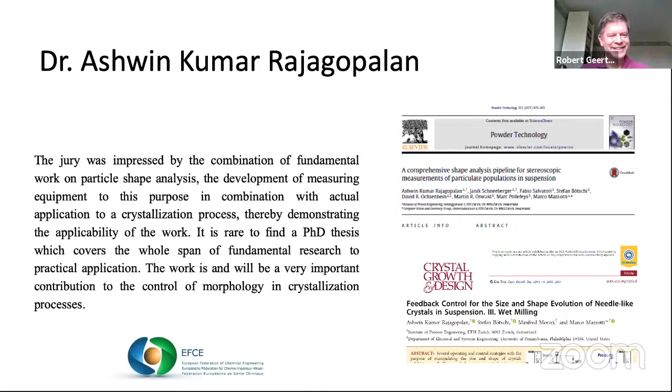But again, well done and congratulations.

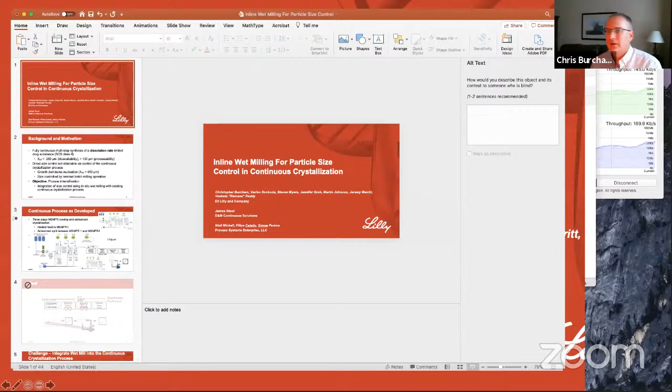Robert, thank you for that very kind introduction. It has been 15 years that we've worked together, so it's really quite impressive. It's been a fun ride. Let me get my screen up. Okay, so hopefully everyone has seen the title slide and not the presenter view. Let me go ahead and get going.

Again, thank you for that kind introduction, and I really want to thank the Working Party for the invitation to speak to you today. For those hoping for Jean-Paul, I apologize. I won't be anywhere close to his level of presentation skills, but I do hope you'll find what I'm talking about today interesting and hopefully motivating. Today I'll talk about utilization of inline wet milling for particle size control during a continuous crystallization. When we started this work, it seemed like such an easy concept, but it turned out to have some challenges that were pretty exciting to overcome.

This project that I will discuss is a very real project, and you can tell by the large number of collaborators on this work that there was a lot going on. This was part of a multi-step, fully continuous drug substance process, which involved three different chemical transformations, a couple of different separations - liquid-liquid extraction, distillation, concentration, you name it - and then at the tail end was the crystallization and isolation of the API. I want to call out one particular colleague, Václav Svoboda. Václav really should be giving this talk today - he did the lion's share of the experimental work I'll be discussing. I appreciate and acknowledge all the efforts he provided, and also my collaborators at PSE who helped with the modeling aspects I will discuss.

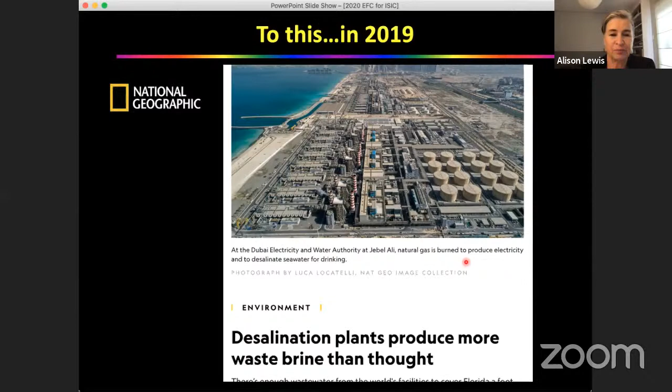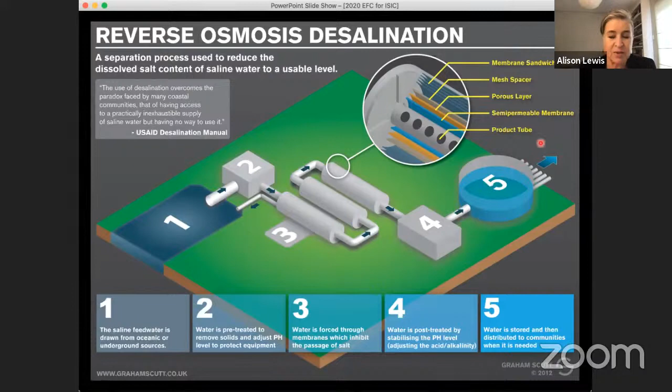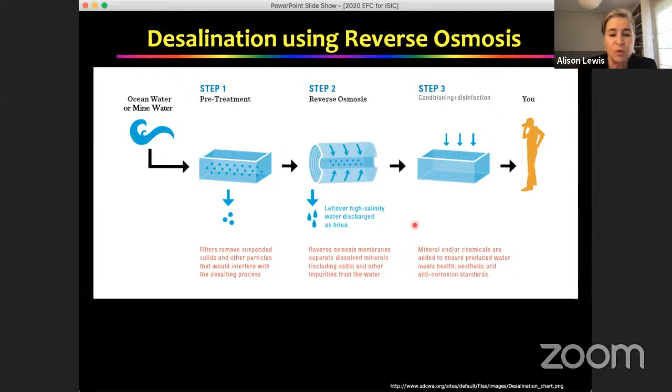If you look at various flow sheets available on the web showing how reverse osmosis desalination works, you'll see something like this: seawater coming in to be treated in the RO system, the post-treatment, and here's the fresh water produced. But chemical engineers will see something missing here - the waste stream. What it should actually look like is the same process: you treat either ocean water or mine water to desalinate it through reverse osmosis, but here you produce a leftover high salinity brine. The question is what to do with that brine.

Let me show you an example in South Africa of industries that generate brines. On this graph, I've got the industries on the x-axis, and the bars show either the total effluent of brine, with the red bar showing the effluent excluding discharge to the marine environment. For example, fish processing produces a huge amount of brine, but it's all discharged to the sea, so we look at the red bars for inland disposal areas. Here we have paper, pulp and wood, petroleum, mines, and power generation being our biggest generators of brine.

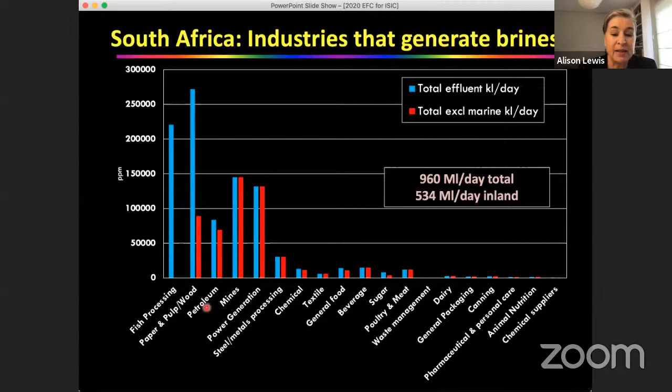Most of those brines are put into brine ponds, which are expensive, unsustainable, and in fact there's new legislation just come out in August of this year which says that it's not acceptable to build brine ponds anymore. So the industry is looking for solutions to treat these brines.

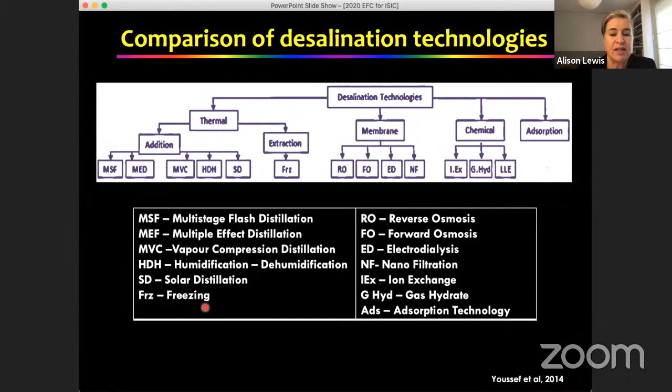Here are some options of desalination technology. You'll see there's a huge menu here. But one of the issues is if you look at that menu of options and rank them according to the maximum feed salinities, you'll see that it's only multistage flash that can treat up to 70,000 ppm. Reverse osmosis, which is the workhorse of the industry, treats up to 45,000 ppm. And after that, you run out of treatment options.

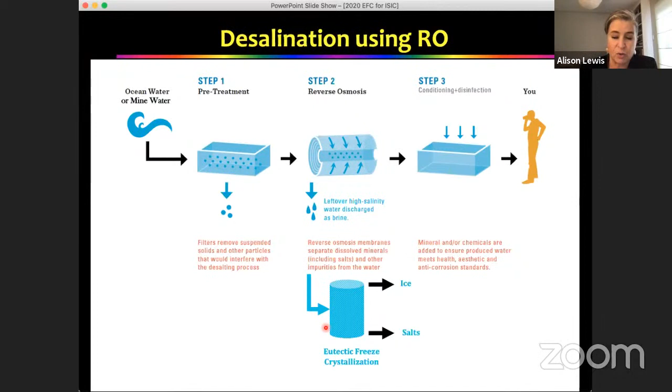So our proposal is to take this leftover high salinity brine and put it through a eutectic freeze crystallization process to produce ice and salt. The ice, of course, is the water that you're recovering. And because of the density difference, ice will float and salt will sink, so you can have a solid-solid separation process.

So how this works in practice is, here's the crystallizer filled up with brine. You drop the temperature to below 0 degrees because you're having a freezing point depression in the saline water. Just below 0, the ice will start to form. At some lower temperature, your salt will start to form. Because of the density difference, the ice will float, the salt will sink, and you can recover ice and salt.

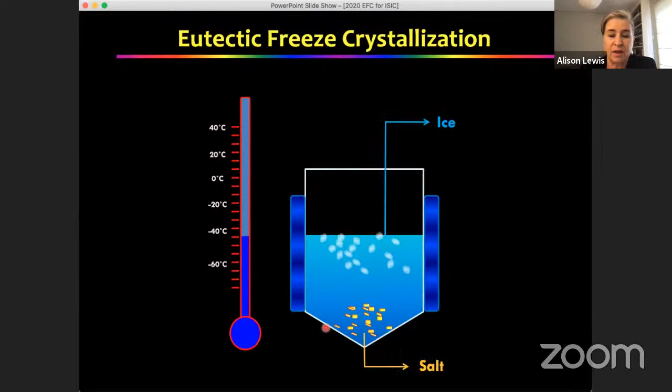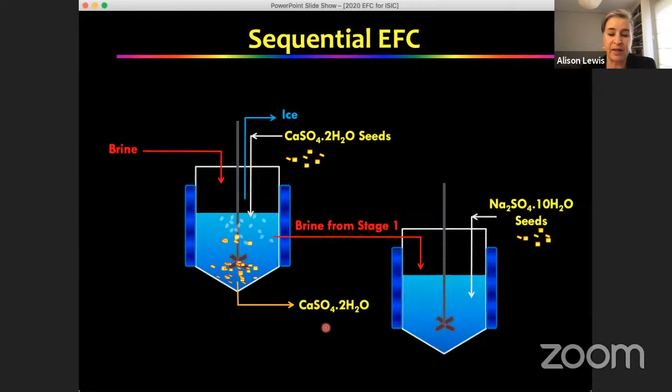Theoretically, you can do this sequentially. So in the first crystallizer, you feed the brine in, seed with the salt of your preference, recover, for example, calcium sulfate and ice, and then feed the remaining brine from that stage into a second stage where you seed with a different salt. So for example, sodium sulfate, recover the sodium sulfate and the ice.

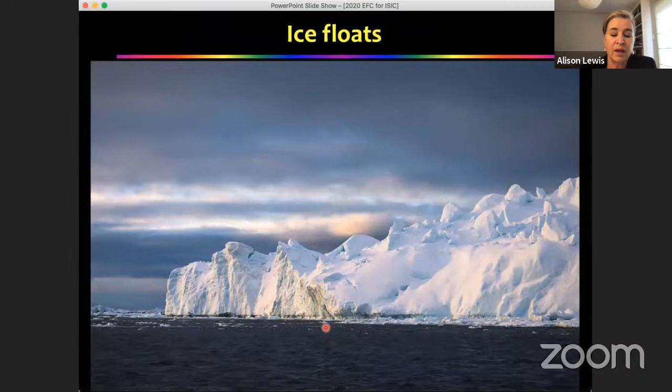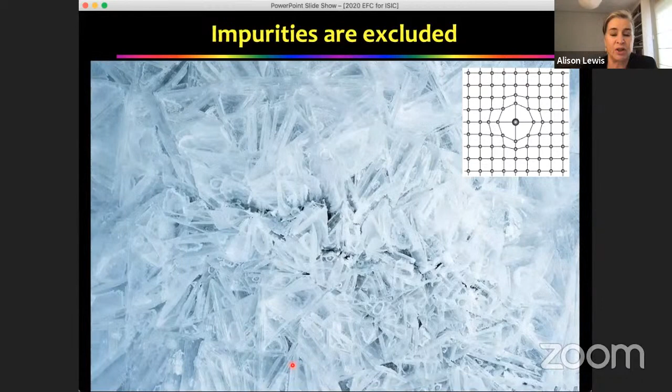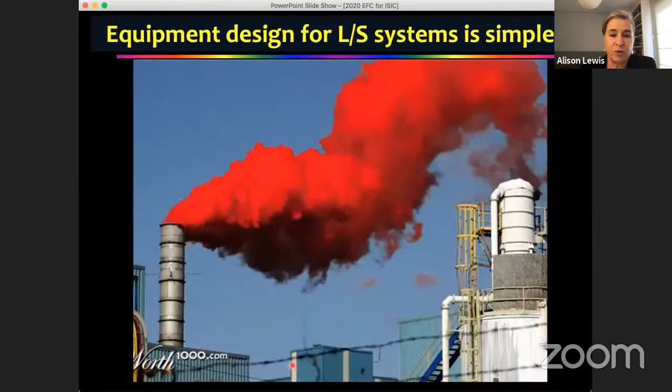Another advantage of the eutectic freeze process is that ice floats. Impurities are excluded from the ice crystallization due to the small size of the ice molecule. Corrosion at the low temperatures is minimized. Working at low temperatures is also safer. Equipment design for liquid-solid systems is simpler than that for liquid-gas.

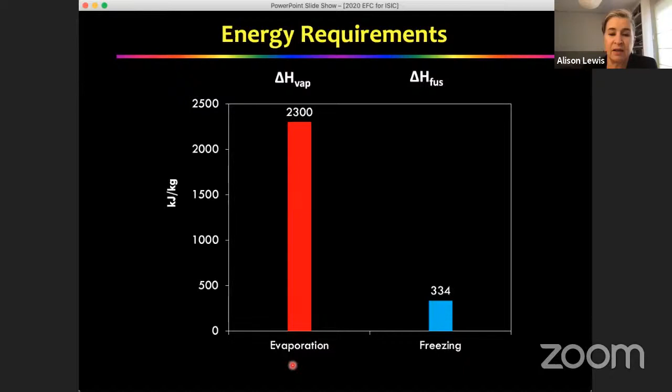There's no added chemicals. And the energy requirements: the difference between evaporation, where the heat of vaporization is 2,300 kilojoules per kilogram, and freezing, where the heat of fusion is 334 kilojoules per kilogram. So there's 1/6 of a difference there, as well as the fact that the heat of fusion is released when you crystallize the ice. So this makes the carbon footprint of this process potentially much, much smaller than that of evaporation.

So I'm going to present a case study that we carried out in our labs at the University of Cape Town. This was a brine from flue gas desulfurization. You'll see here it's a multi-component brine with a large concentration of magnesium, but also sodium and calcium, and then large concentrations of sulfate and chloride, but also bromide and fluoride.

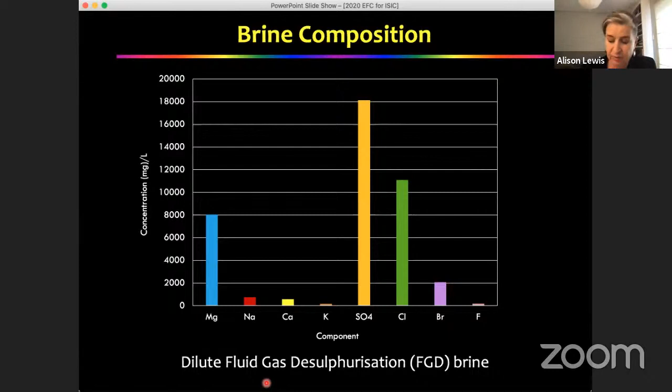So the first thing we did was carry out a thermodynamic modeling exercise. We used a program called OLI Stream Analyzer, which uses a mixed solvent electrolyte framework. On this graph, you can see the x-axis shows how we dropped the temperature from 5 degrees all the way down to -25, and on the y-axis we have the grams per liter of either the ice or salt produced.

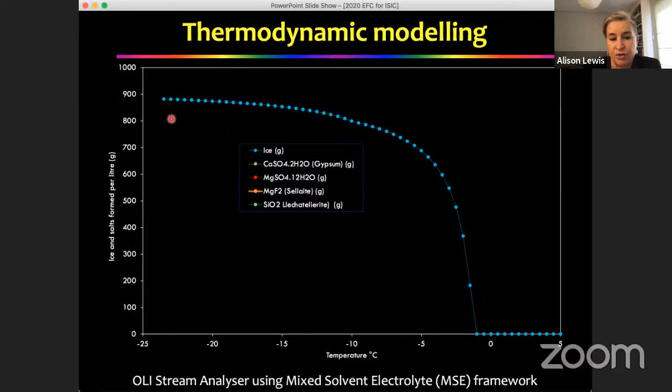So the first series is ice, and you can see here that the ice nucleates below 0 degrees C, and at the maximum here we're recovering almost 900 grams of ice per liter of water. We also produce calcium sulfate or gypsum, magnesium sulfate, which nucleates at quite a low temperature of -10. We're also producing magnesium fluoride in low quantities and silicon dioxide.

So if we look at the major salts and their nucleation temperatures, we have both ice and calcium sulfate nucleating at -1.5 degrees, followed by magnesium fluoride at -2, and magnesium sulfate dodecahydrate at -10.

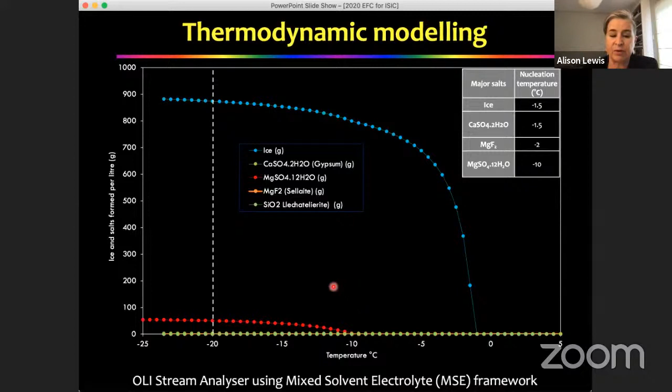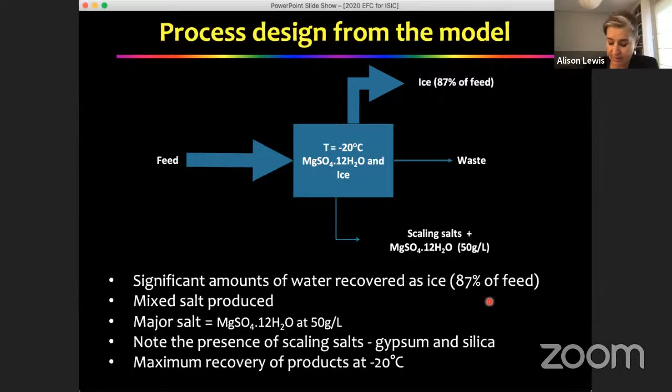So part of the modeling exercise tells us that we should be operating our process for maximum recovery at about -20 degrees. If we translate this into a process design, we would have significant amounts of water recovered as ice, and our prediction at -20 is 87% of the feed. We'd be producing a mixed salt, the majority of which would be magnesium sulfate at 50 grams per liter. We are, however, also producing a couple of scaling salts, gypsum and silica, and we're predicting the maximum recovery of the products at -20 degrees.

If we look at the experimental validation, which was the next part of our process, what we discovered was that our ice recovery was only 60% of the feed, which is still very reasonable, but we only recovered one salt, and that was the calcium sulfate. And that was only recovered at -3.17 degrees C. So that is pretty different to the modeling that we predicted.

We also showed that operating a single stage at -20 degrees is not practical for multiple reasons, and I'll go into those shortly. But this also does show the importance of not only modeling, but validating the model, as well as the importance of kinetics. And I think this also echoes the earlier speaker who was speaking about exactly this: modeling, validation, the importance of kinetics. I suppose the next part was something that looks easy in theory is sometimes more challenging in practice, but I'll get onto that in a moment.

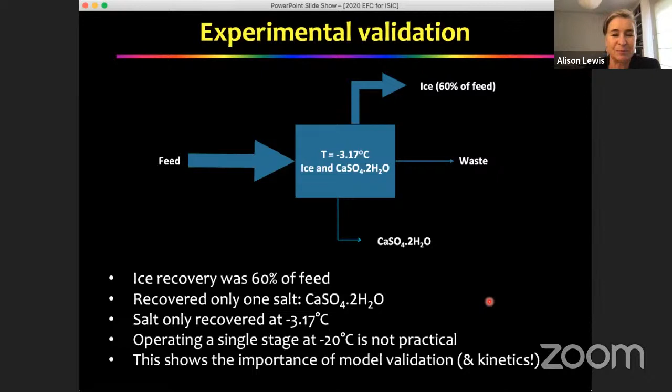So the products we produced were ice and our calcium sulfate dihydrate salt. In practice, we ended up with a multi-stage process design, partly because ice management is just not possible in a single stage. You're producing 60% of your feed in the form of ice, and it's impossible to manage it in a single crystallizer. So we ended up splitting it into 4 stages in order to effect the ice removal.

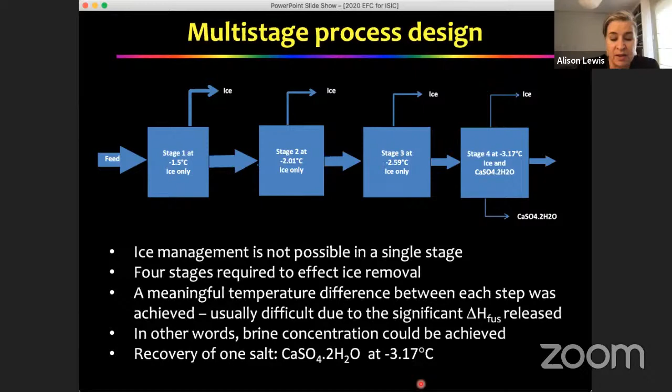But the other really important reason for doing the multi-stage process is that it allowed us to have a meaningful temperature difference between each step. Usually, if you form all the ice in one step, with the heat of fusion release, it's really difficult to get the temperature down and thus effect the brine concentration that's necessary in order to start producing the salt. So even after all this, the 4 stages, each one at a meaningfully different temperature, we still only produced 1 salt, and that was the gypsum at -3.17 degrees.

So our conclusions of this stage of the project: this is an implementation of multi-stage EFC. Up to now, it's only been theoretically possible, and all applications have been single stage. We've shown that significant quantities of ice need to be crystallized before achieving freezing point depression and solution concentration. As I've said, it was necessary to use a multi-stage process to get this meaningful temperature difference. And understanding this need for multi-stages is absolutely key in our view for design purposes.

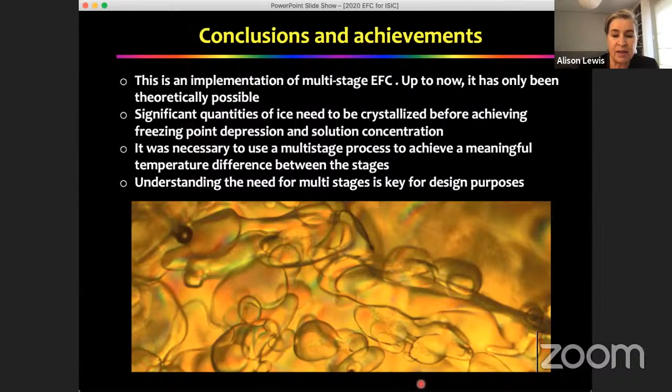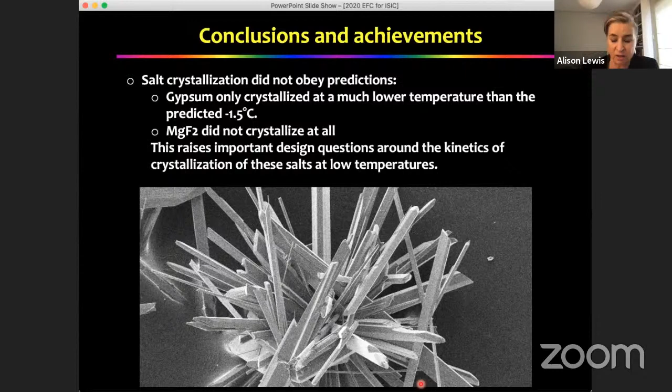We also showed that salt crystallization did not obey the predictions. Gypsum only crystallized at a much lower temperature than predicted. Magnesium fluoride did not crystallize at all. And once again, this raises important design questions around the kinetics of crystallization of these salts at low temperatures.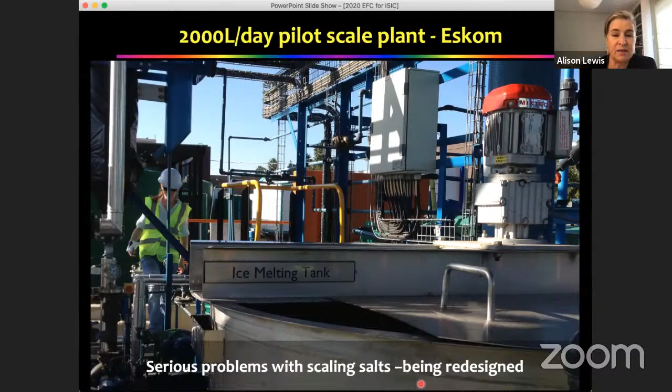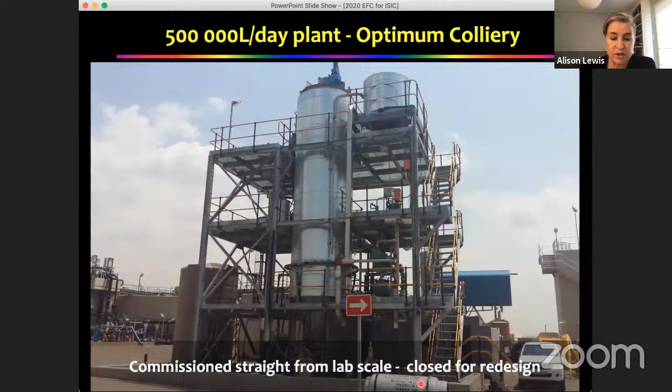This is a 500,000 liter per day plant built at Optimum Colliery, and it was commissioned straight from the lab scale, which I think was one of the many reasons there were issues with it. There were issues with not only scaling, but also scraper design. So this is now also closed for redesign. And this other 28,000 liter per day plant at Tweefontein is currently being redesigned to accommodate scaling salts.

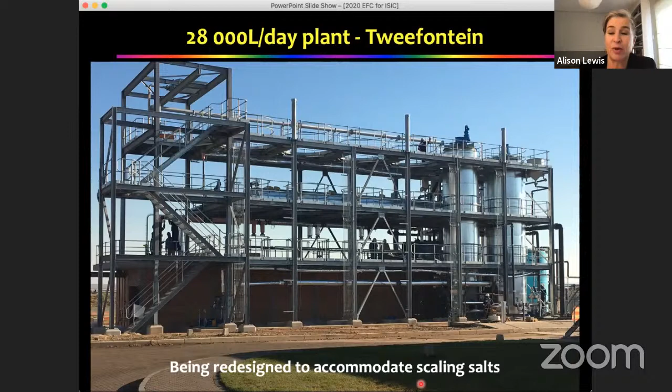So I wish I did have a final slide showing you the successful design, but that'll probably have to wait for the next ISIC. So the lessons we have in Scale Up so far is that modeling has huge value in identifying the right applications or place for eutectic freeze crystallization, and that it's really important to integrate it with existing technologies like reverse osmosis. So in other words, thinking systems and processes instead of just technologies.

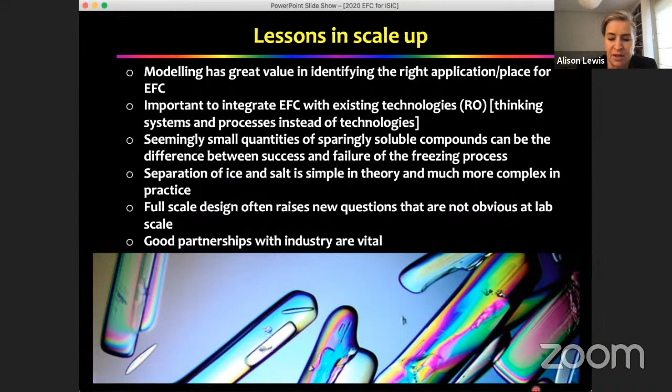One thing that is common between all 3 of those large-scale plants is that seemingly small quantities of sparingly soluble compounds can be the difference between success and failure. Separation of ice and salt is very simple in theory and much more complex in practice. Full-scale design often raises new questions that are not obvious at lab scale. And lastly, good partnerships with industry are absolutely vital.

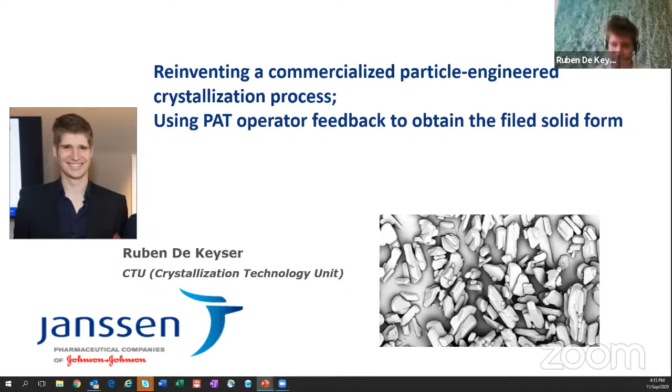I'll give you a small story on the Janssen problem we had a few years ago. So once upon a time, we had an API which was a multi-ton drug, which was a hemihydrate, and it was already commercialized. But then the earth shook and a big problem arose. The nightmare of all pharmaceutical companies happened, and after commercialization, a new polymorph showed up. This polymorph, pseudopolymorph in this case, was even more stable. The problem was that it was already commercialized.

So the constraints for the process at this moment were that the product is a hemihydrate. The PSD is fixed in a very narrow range. Because it's a multi-ton drug, there's a big pressure on the cost of goods. And of course, the timeline was by yesterday.

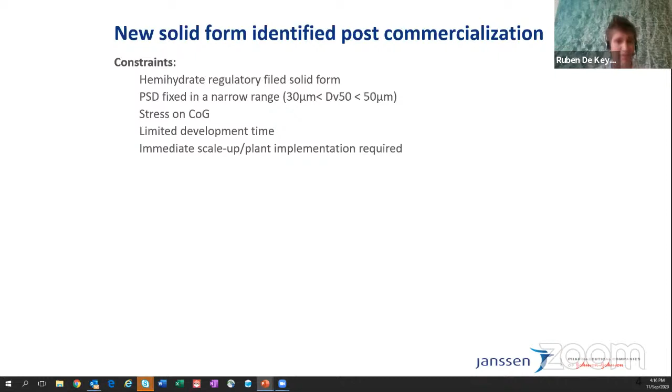Now, how did we tackle this problem? First, we had to know where we were, in fact. We didn't know anything about the monohydrate, so the phase diagram was mapped. We tried to stabilize the process that we had in our production plant at that moment. And then in the meanwhile, we did some exploration routes to how we can have form control and PSD tuning at the same time. Then we found out that PAT was the way to go. And in the end, I'll show you the final process overview.

So now, at first, a little bit of background is that it's the hemihydrate, and the process solvent is isopropyl acetate/water. For those who do not know isopropyl acetate, it's already separating water after about 1.8 weight% of water. So the water activity is in fact very high. A little bit more water gives already a lot higher water activity. Therefore, the hemihydrate is less stable.

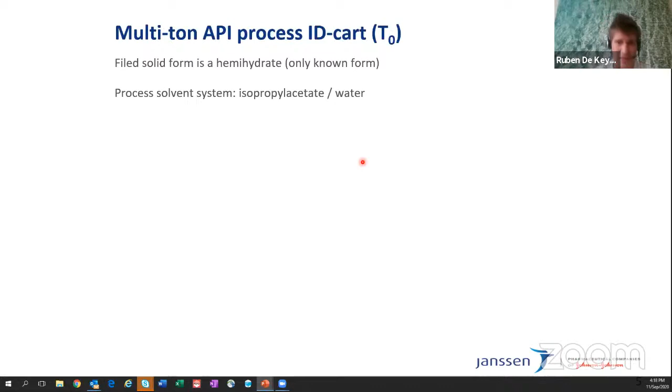In the initial investigation, we needed to tackle the needle-like crystals with inline crystal engineering to end up with rod-like crystals. So we had to face the form problem, but we also had to face the particle size problems. It wanted to grow into needles. Then it was already a process which had a very high throughput and a good yield. So we all need to match this.

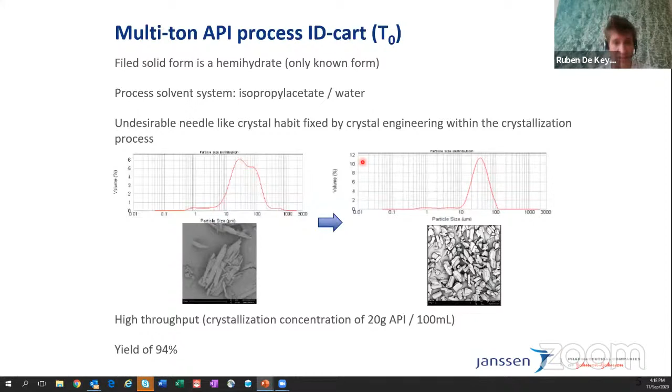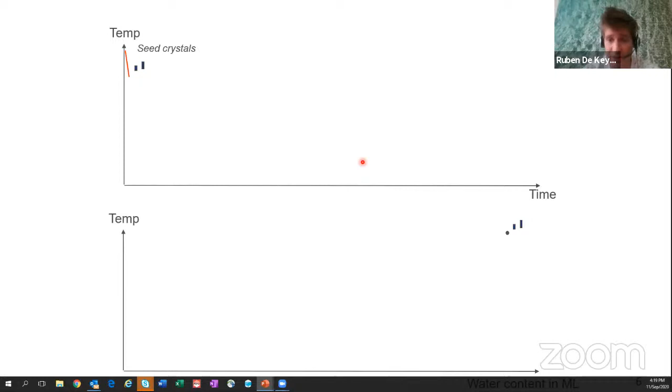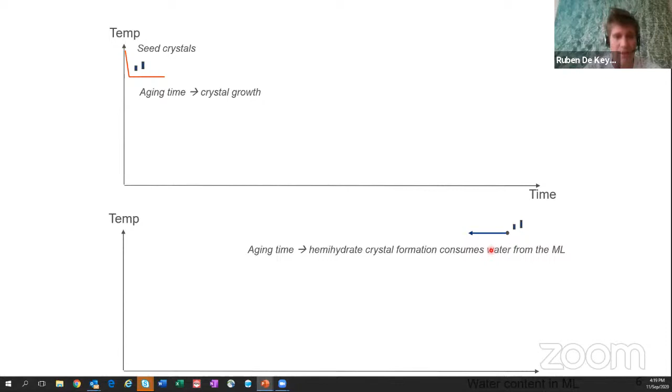The old process I'll show you here is in function of temperature and time, but also for the phase diagram part, we also take into account temperature as a function of water content in the mother liquor. If we seed our solution, the crystals will start to grow. While they grow, they take up water from the mother liquor. Because it's a hemihydrate, it will consume water to build crystals. If we then cool further, it goes into needle-like crystals.

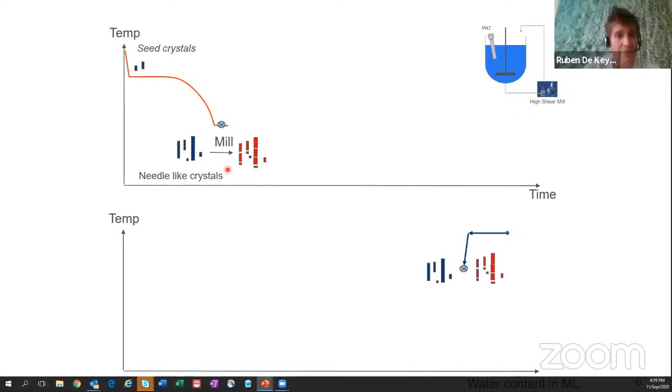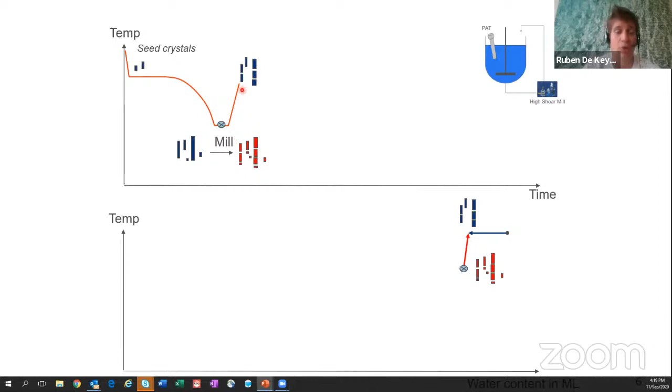Then we will mill those needle-like crystals down into smaller bits. These smaller bits are dissolved in an Ostwald step in the whole reactor. So the crystals are in the reactor, they are high shear milled and recirculated into the reactor vessel. Then the whole reactor is heated, the smalls dissolve, and we repeat this twice so that instead of needle-like, we get rod-like crystals.

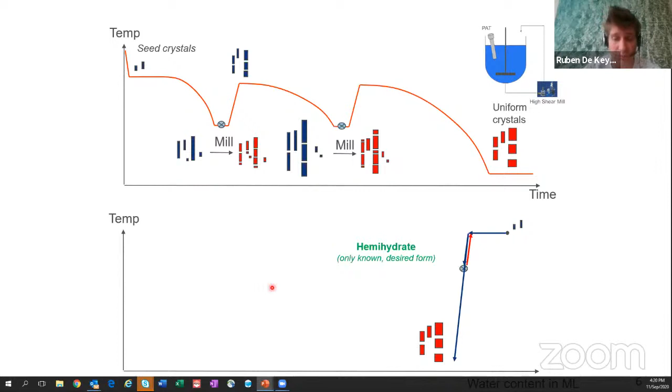In the temperature over water content graph, you can also see how it goes. During aging, a lot of water is already incorporated, then high shear milling, Ostwald, and cool down to isolation. As far as we knew then, it's completely in the hemihydrate zone. But then the monohydrate appeared. As you can see, both the crystal engineering step, the high shear milling, and the isolation are in the monohydrate favored part of the phase diagram, therefore making the process metastable. So it was always luck for us that we could isolate hemihydrate anyway.

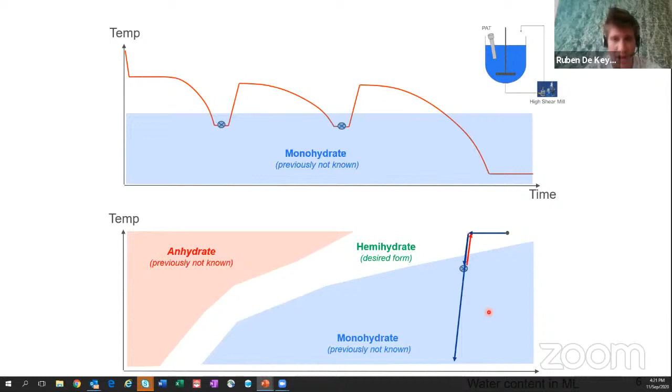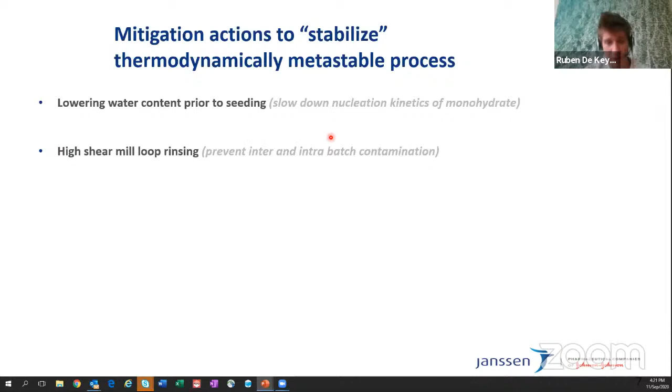How did we now stabilize this thermodynamically metastable process? We tackled especially the formation of the monohydrate. Because we never encountered it in initial polymorph screenings, the nucleation is always very slow. So by lowering the water content prior to seeding, we slow down the kinetics even more. We had to rinse the high shear mill loop during the batch, because there were two high shear mill steps, and in between batches within the same campaign. All the operators had gowning procedures, so everybody needed to change.

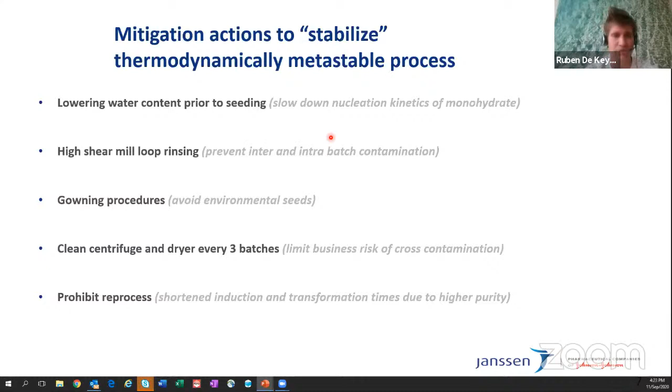For limiting the business risk of a contaminated batch, we had to clean the centrifuge and dryer every 3 batches, instead of having a campaign of 15 to 20 batches. And this gives a yield loss. Yield loss means money, so that's not really favorable. And also, it wasn't possible anymore to reprocess a batch, because experimentally we proved that every time we recrystallize it, both the induction and the transformation times of the hemihydrate to the monohydrate decreased significantly. So it wasn't possible to do any reprocess anymore.

So now you know our constraints, what we at least have to deliver in our new process, and where we are. So a very small target of hemihydrate. So how did we now tackle it? The different ways of going to the correct form, and the eventual process you'll see.

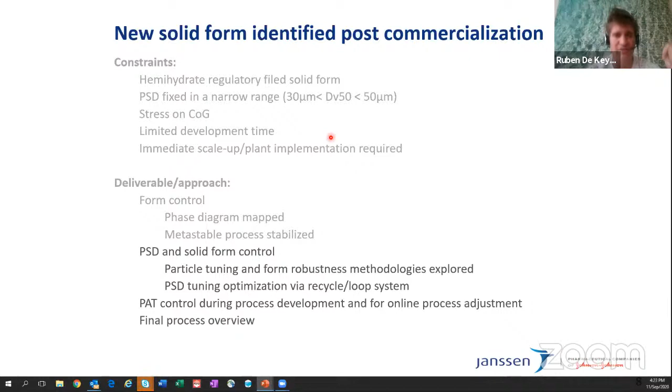First, we tested some alternative solvents. As I already mentioned, the water activity in isopropyl acetate/water is very high. So we modeled the water activity as a function of weight percent water in the mother liquor, and then we took less steep solvents, where we had a much broader window in water activity. However, this came a lot lower in yield, and the morphology, as you can see, is significantly different. So this wasn't an option to implement.

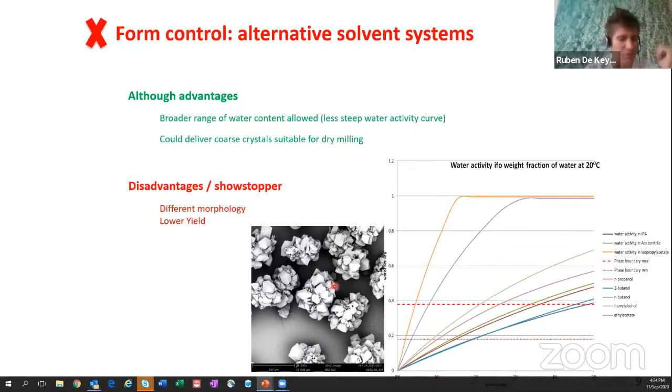If we do form control with continuous crystallization, this is also possible. However, this is way too complicated for the current plant, and the control of the water was way too difficult.

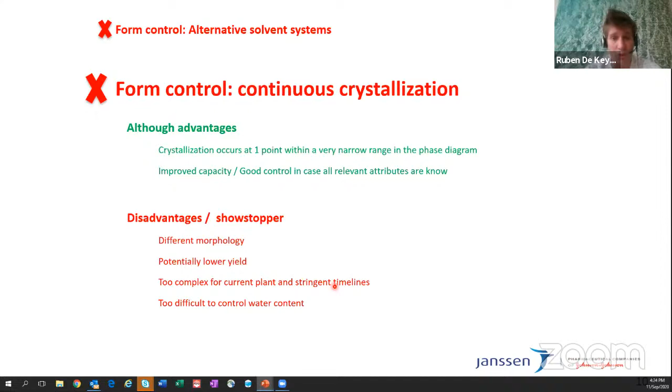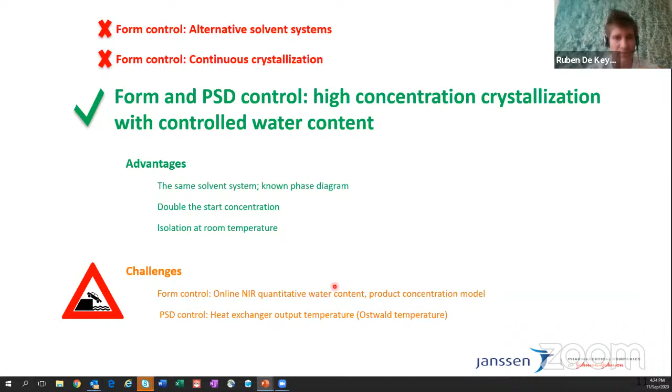Therefore, we went to a highly concentrated crystallization and control of the water content. So there was a problem though: it's form control and PSD, but this is what we tackled, as you will see in a short bit. This is the phase diagram.

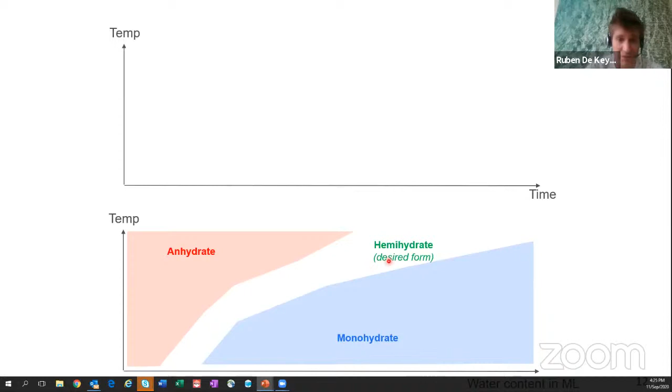So the hemihydrate is the desired form. As you can see, it's very narrow at isolation temperature. Therefore, in fact, we did a reversed engineering. We knew that at isolation temperature, we only had a 0.10 weight% water window where the hemihydrate is thermodynamically the most stable. If we have it at isolation temperature, 0.1 weight%, we know that at seed temperature, we also have only 0.1 weight% of water as a window where the hemihydrate will be

safe at the end. And prior to seeding, our solution is homogeneous. When our solution is homogeneous, we can use quantitative NIR measurement to adjust our water content and the concentration of the API. So this is where our control of the form comes in. We control the water, the operator gets the number of the water, and only if the water is within the range of 0.1 weight%, the operator can proceed.

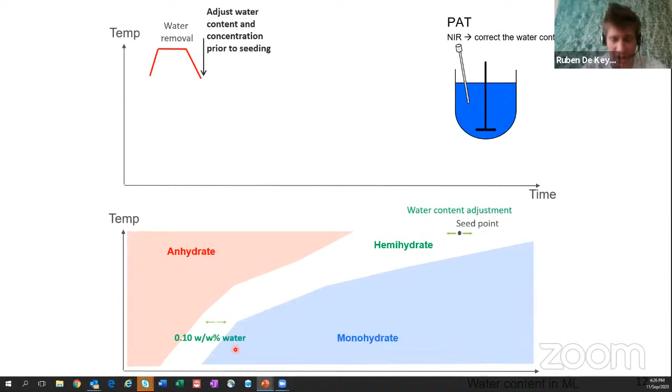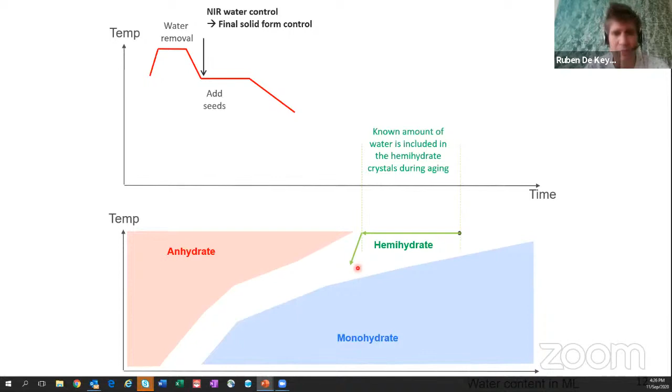After the water adjustment has been done, we seed and we cool. The same as in our old system, we know how much water will be included in the hemihydrate crystals during aging and cooling. Now we have needle-like crystals, so we have to change the morphology. We also implemented a new technology, a new platform for Janssen: subsequently, high shear milling and a heat exchanger.

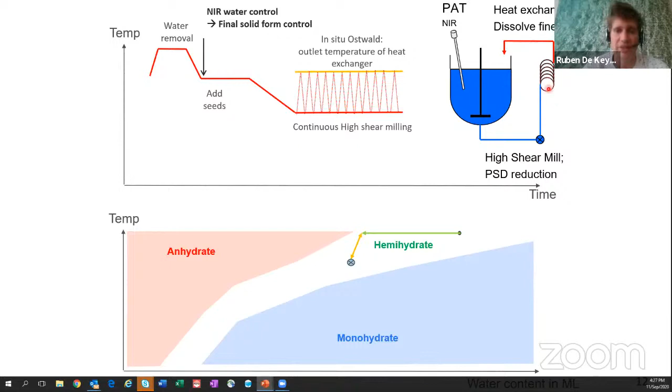So an in situ Ostwald effect. The needle-like crystals go into the high shear mill, and before they even come back into the reactor, the fines will already be redissolved. How does this look in production? We have the needle-like crystals. They get milled within a high shear mill, then they go through the shell and tube heat exchanger, where the suspension is heated. These crystals return into the reactor, all the fines are redissolved, and you get a very narrow particle size distribution.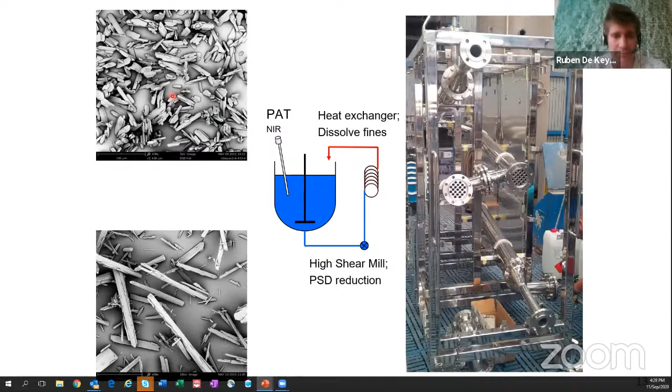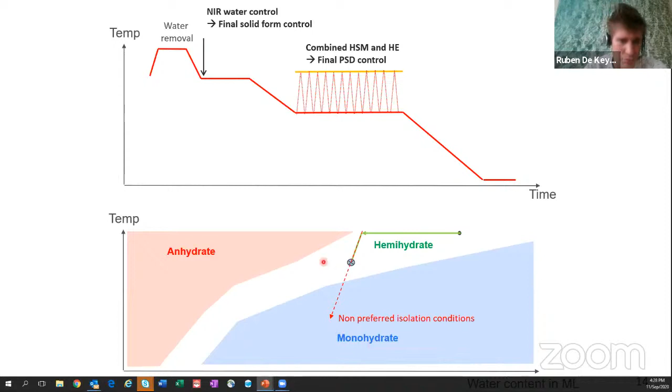So this is where we are now: we have form control and particle size control. If we would cool from the high shear mill step to room temperature, we again come into the monohydrate zone. Therefore, we have to go to this place. How did we do that? Very easily, by simultaneously diluting the system with isopropyl acetate. The water amount stays the same, but by diluting the system, you lower the water activity.

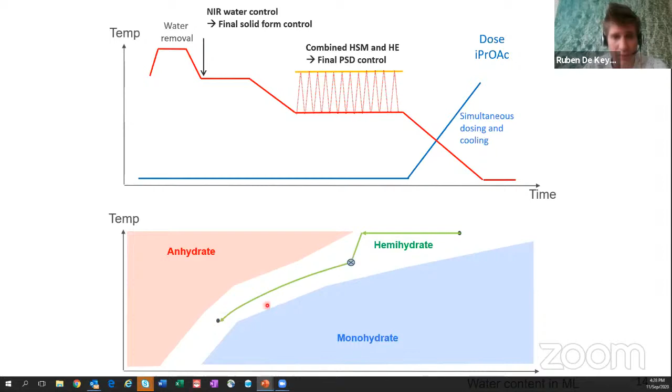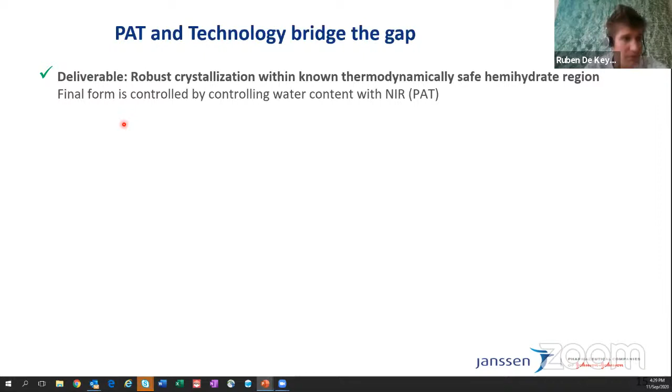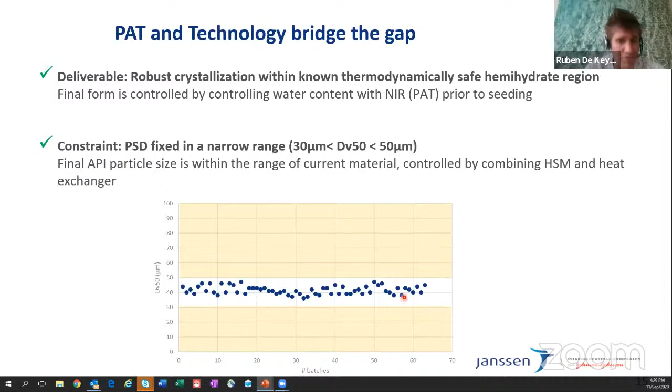So technology and PAT for us bridge the gap. We had to have a robust crystallization within the hemihydrate, and this is now controlled by NIR. Inline PAT gives the operator the signal whether he can proceed or not. By having the high shear mill and the heat exchanger in combination, we have a very robust PSD over the batches. And within the narrow zone, the stress on cost of goods is met.

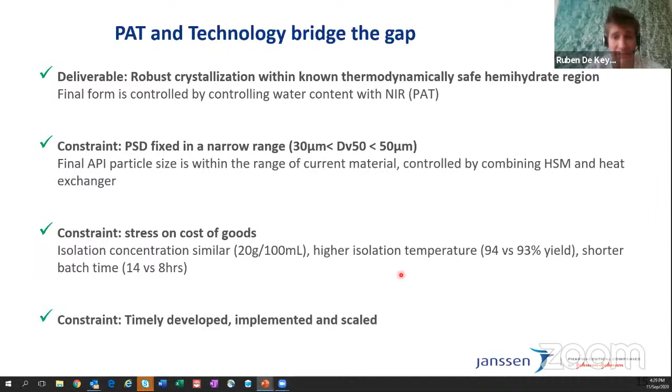We have a slightly lower yield, I have to admit, but the batch time is significantly shorter, 14 versus 8 hours. And it was timely implemented. We still have the danger of the monohydrate, but in fact, we bridged the gap with PAT and technology. Thank you for your attention, and I'll be happy to take questions now.

Thank you, Ruben. It's a very interesting example. You mentioned early on that the range of water content is actually very small, less than 2%. Talk a little bit on how you even constructed the phase diagram. It sounds like you needed extremely precise measurements of the water content, and this balance between the water of crystallization and the water in the solvent itself.

Yeah. So we did all these tests. That's why it was easiest to stay with the current solvent system, isopropyl acetate water, because we took a lot of time to make the competitive slurries within this system. We always used about a third each of anhydrate, hemihydrate, monohydrate. We slurried them with an inline Raman probe to see when there was no more conversion. And then we took Karl Fischer samples of the mother liquor.